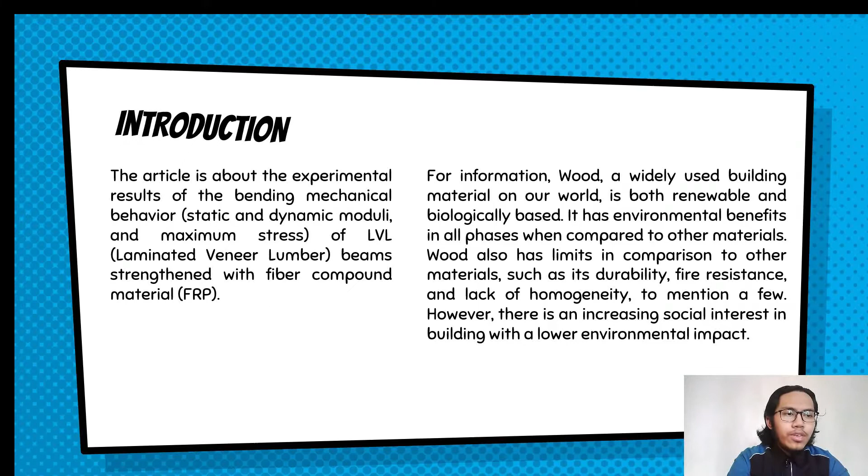For the information, wood is widely used as a building material, which as renewable and biological has environmental benefits in all phases when compared to other materials. Wood also has limits in comparison to other materials, such as its durability, fire resistance, and lack of homogeneity. However, there is an increasing social interest in building with a lower environmental effect.

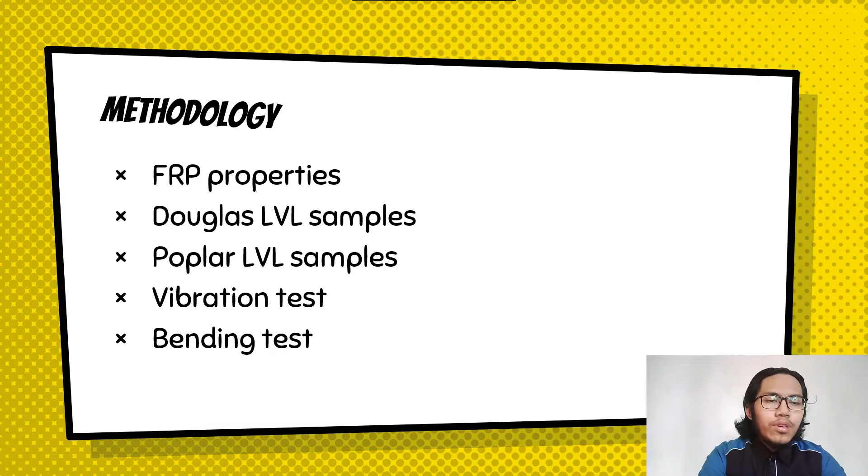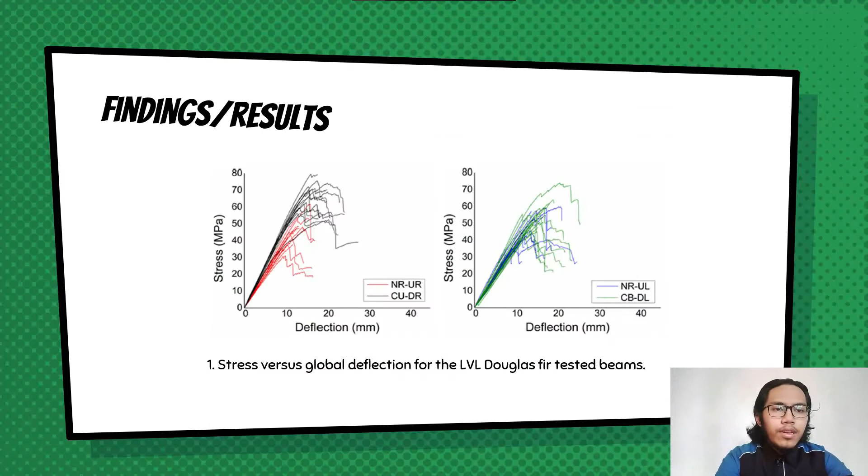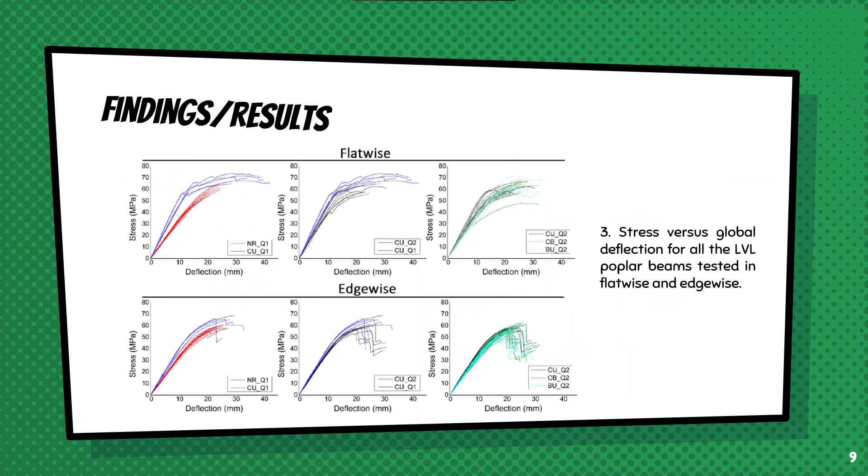For the discussion, first the Douglas LVL. The result summarizes the average values of the main mechanical properties of LVL Douglas fir. It is obvious that two types of reinforcement act differently, and an increase in the maximum stress of 16.4% was achieved for this type of reinforcement.

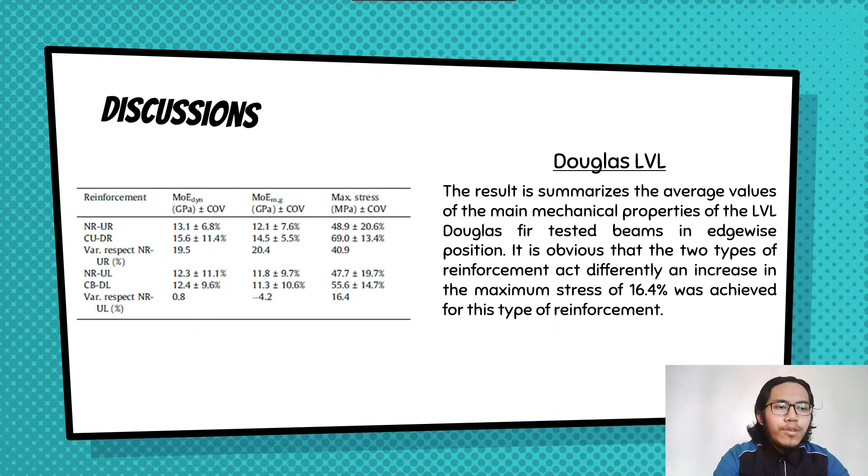For the poplar LVL, the figure shows some examples for each failure pattern. Furthermore, all the beams with FRP tested in flatwise position had shear failure. The reason lies in the fact that the flexural strength contribution of the FRP exceeds the shear strength of the poplar veneer itself. As a result, shear resistance becomes a key aspect for both design and proper application of the reinforcement.

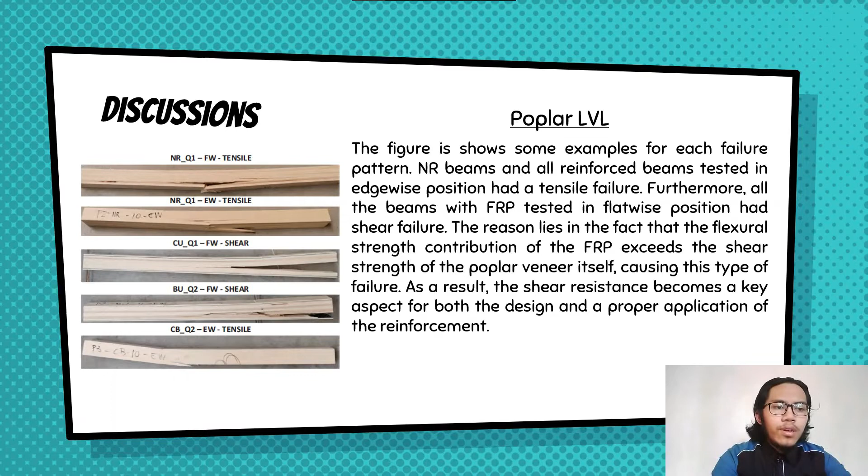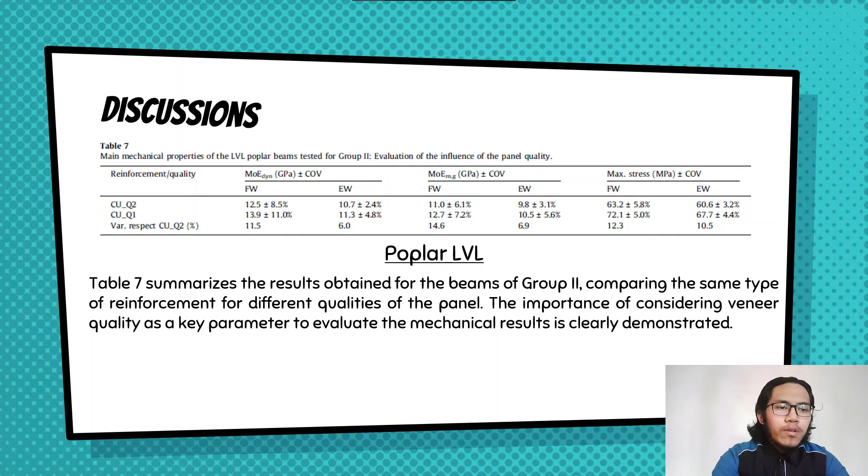The table above summarizes the results obtained for the beams of Group 2, comparing the same type of reinforcement for different qualities of the panel. The importance of considering veneer quality as a key parameter to evaluate the mechanical result is clearly demonstrated.

In conclusion, directional carbon has been shown to provide a significant improvement. The influence of the panel veneer quality was also clearly demonstrated. The weakest wood material improved the most in mechanical qualities when reinforced, allowing for stiff second quality poplar LVL or strong second quality Douglas fir LVL.

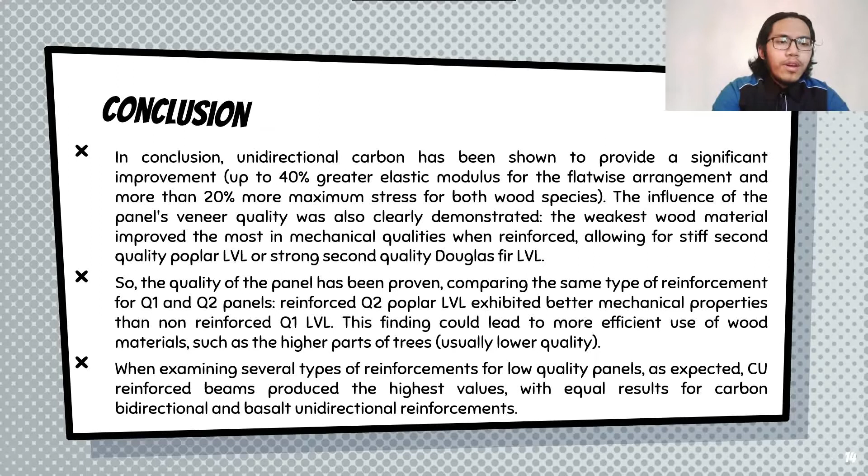The quality of the panel has been proven compared to the same type of reinforcement for Q1 and Q2. Reinforced Q2 poplar LVL exhibited better mechanical properties than non-reinforced Q1 LVL. And lastly, when examining several types of reinforcement for low quality panels, as expected, reinforced beams produced the highest value, with equal results for carbon bidirectional and basalt unidirectional reinforcement.

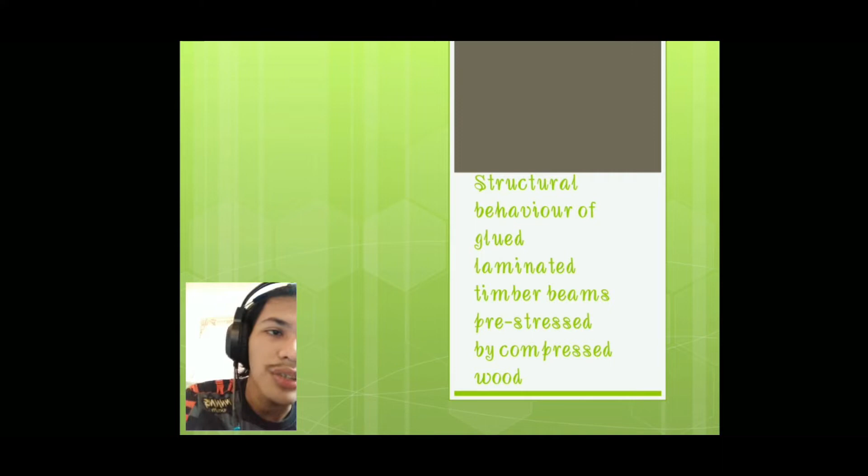Today I will present about the structural behavior of the glue laminated timber beam, which is glulam pre-stressed by compressed wood. For the introduction, this article shows an experiment about the glulam beam that's strengthened by inserting the compressed wood block into the pre-cut rectangular hole, which is 1/3 of the beam depth from the top of the beam.

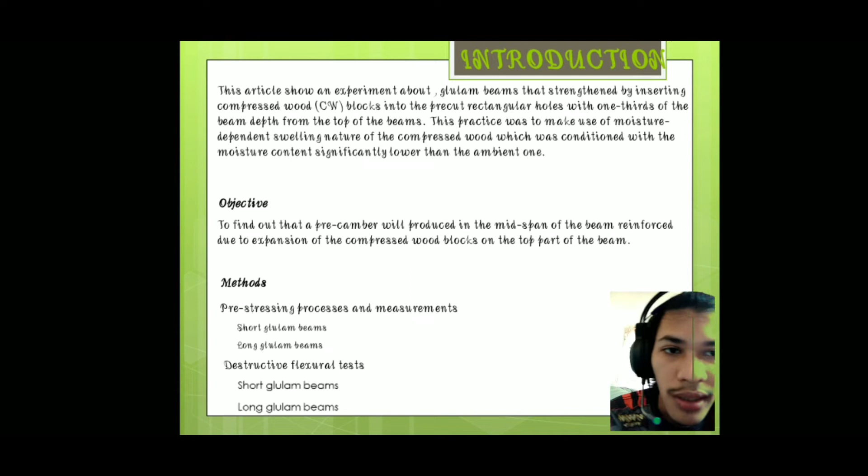This practice makes use of the moisture-dependent swelling nature of the compressed wood, which was conditioned with the moisture content significantly lower than the ambient one. For the objective, to find out pre-camber will produce the mid-span of the beam reinforced due to the expansion of compressed wood blocks on the top part of the beam.

The method used in this article is the pre-stressing process and measurement for the short glulam and long glulam, and then destructive flexural test for the short and long glulam.

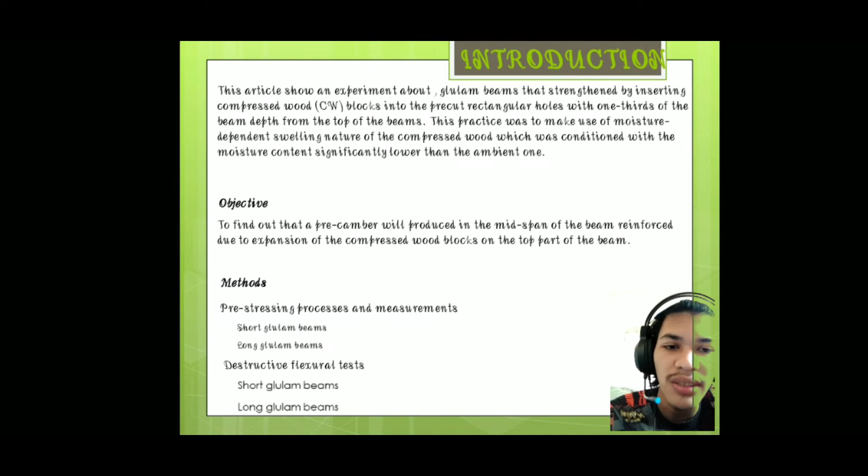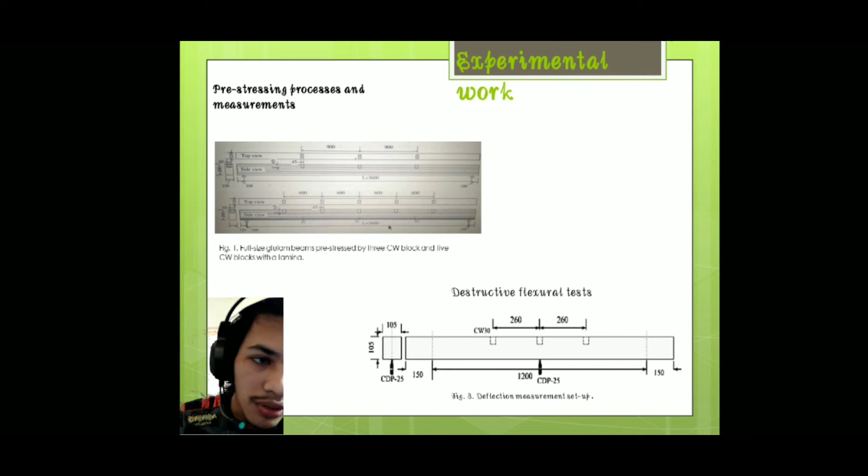The experimental work first is the pre-stressing process and measurement. The diagram shows the full size glulam beam pre-stressed by 3 compressed wood blocks and 5 compressed wood blocks with lamina. Next is the destructive flexural test, which is the diagram about the deflection measurement setup.

Result and discussion for the pre-camber deflection and pre-stressing state. Diagram 4 shows the strain gauge location through the long beam depth.

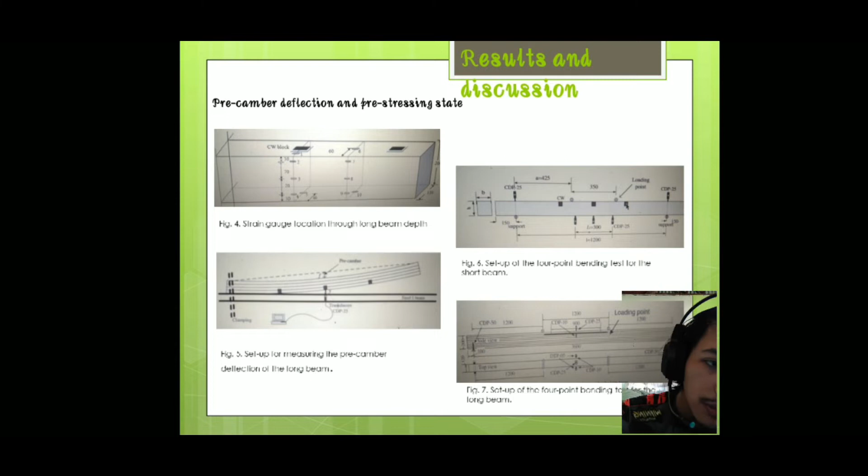Figure 5 shows the setup for measuring the pre-camber deflection of the long beam, and figure 6 shows the setup of the 4-point bending test for the short beam, and figure 7 shows the setup of the 4-point bending test for the long beam.

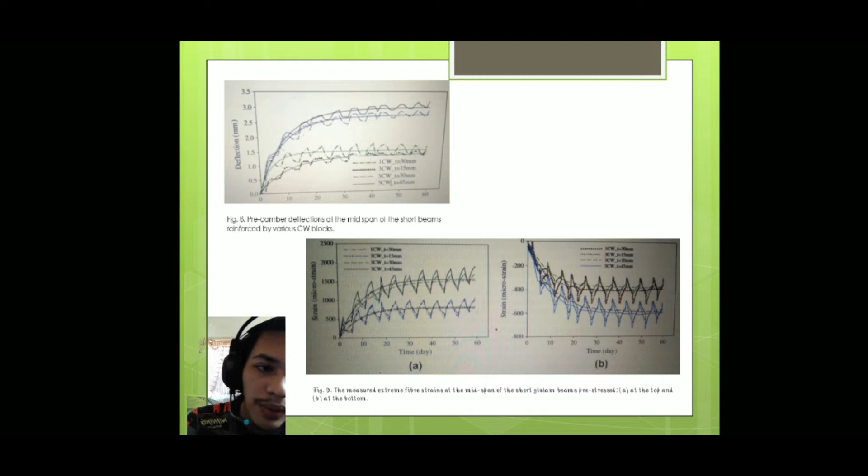Figure 8 shows the graph of pre-camber deflection of the mid-span of the short beam reinforced by the various compressed wood blocks, and figure 9 shows the graph of the measured extreme fiber strain of the mid-span of the short glulam beam, pre-stressed at the top and the bottom.

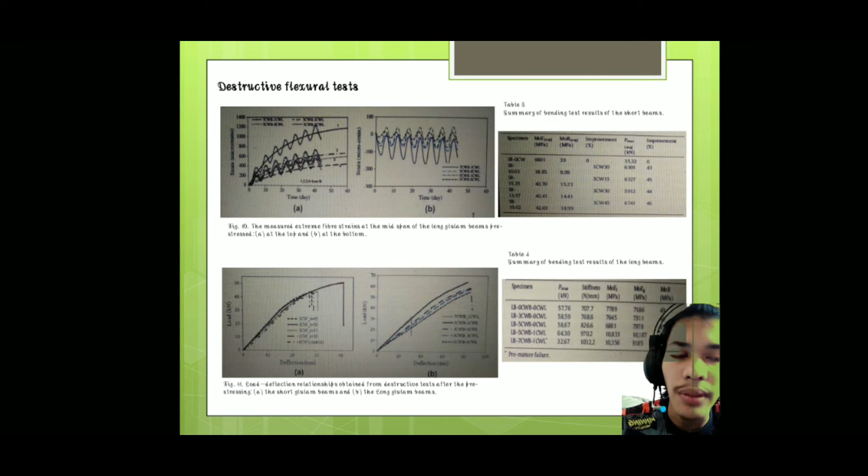A is the short glulam beam and B the long glulam beam. Table 3 shows the summary of the bending test for the short beam, and table 4 is the summary of bending test for the long beam.

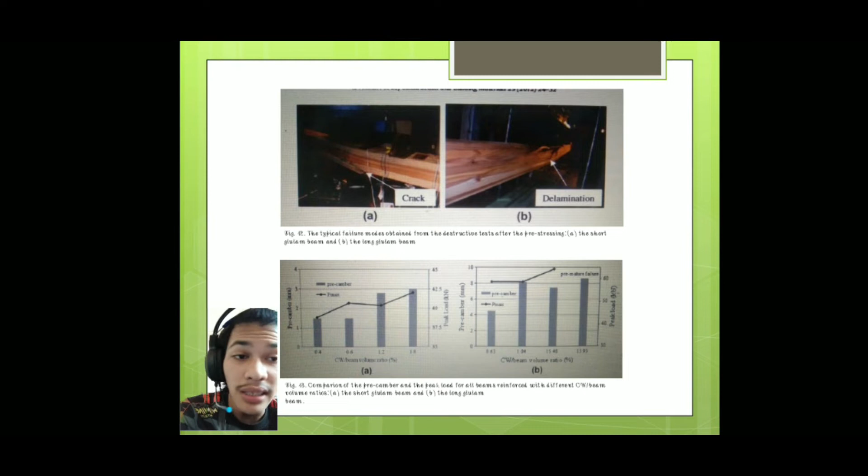Figure 12 shows the typical failure modes obtained from the destructive test after pre-stressing. The short glulam beam will be cracked, and for the long glulam beam it will be delamination. Figure 13 shows the comparison of the pre-camber and the peak load at all beams.

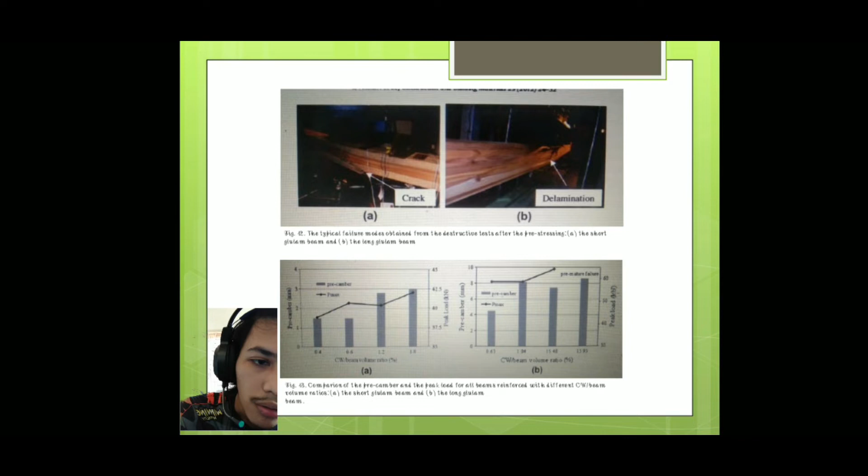All beams are reinforced with different compressed wood or beam volume ratios. A is the short glulam and B is the long glulam.

In conclusion, the use of compressed wood made of low grade wood through densification as a reinforcing material has been proved effective, as only a small amount of compressed wood is required and no bonding between the compressed wood and the beam is necessary. The technique developed is economical and environmentally friendly.

This shows that controlled moisture-dependent swelling of compressed wood are crucial to pre-stress the glulam beam and to produce the pre-camber, as well as initial stress to partially cancel out working counterparts before the destructive bending test. These indicated tests significantly enhance the bending capacity and initial stiffness.

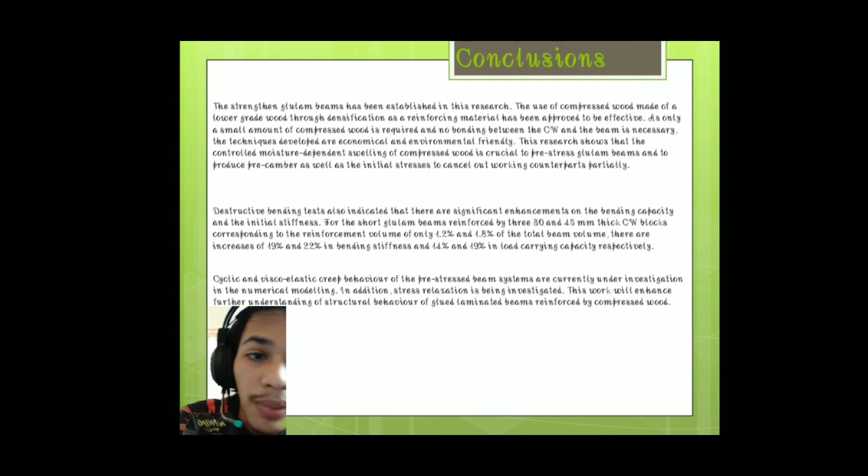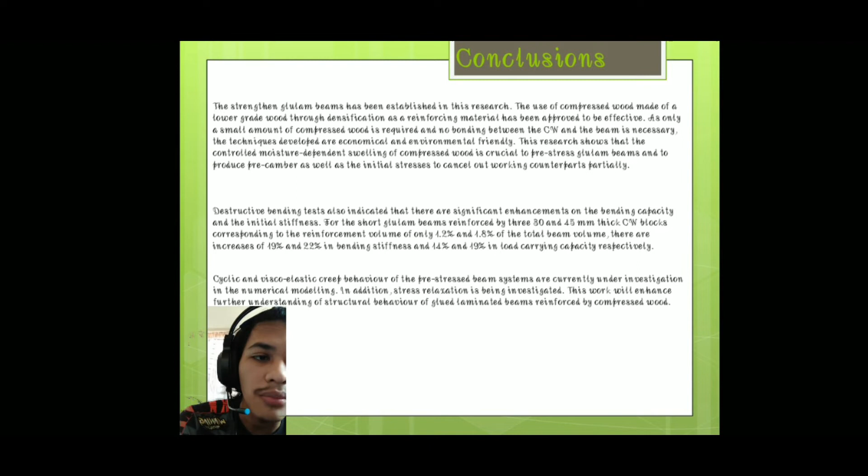For the short beam, reinforced by three 30 and 45 mm thick compressed wood blocks, corresponding to reinforcement volumes of only 1.2% and 1.8% of the total beam volume. There was an increase of 19% and 22% in bending stiffness, and 14% and 19% in load carrying capacity, respectively.

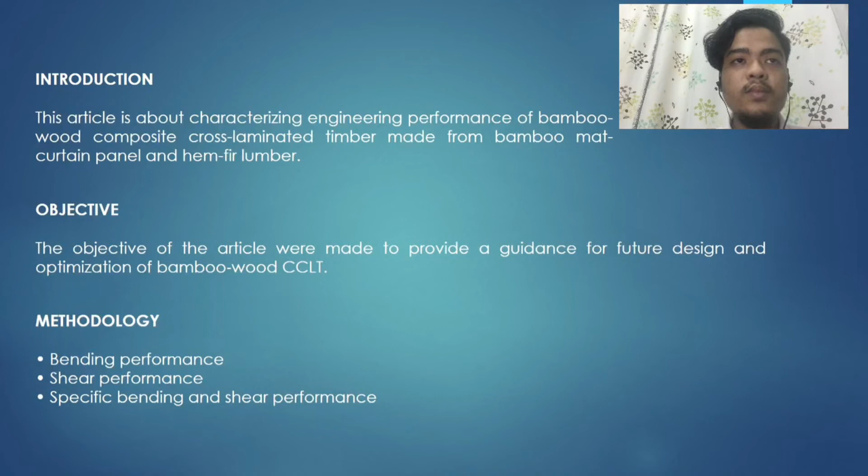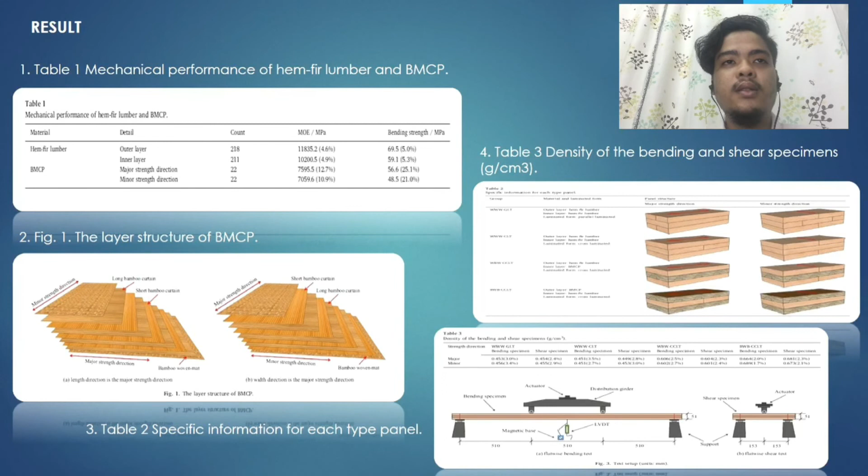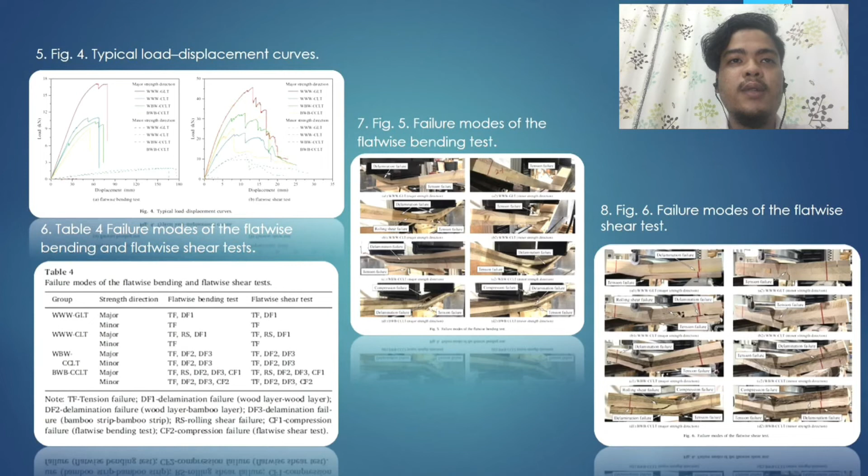Sixth, failure mode of the flatwise bending and flatwise shear test; seventh, failure modes of the flatwise bending test; eighth, failure modes of the flatwise shear test; ninth, test results of the flatwise bending and shear test; tenth, experimental versus theoretical values of bending MOE; and lastly eleventh, correlation between MOE and layer thickness.

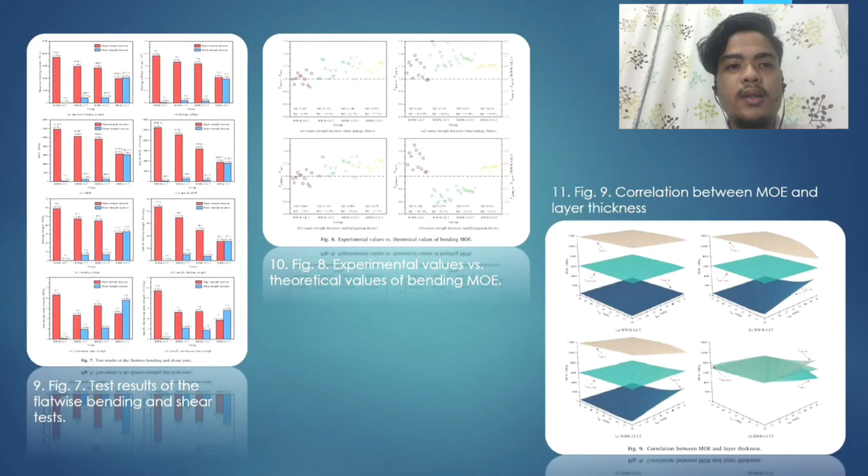This is the discussion of the article.

This is the conclusion of the article.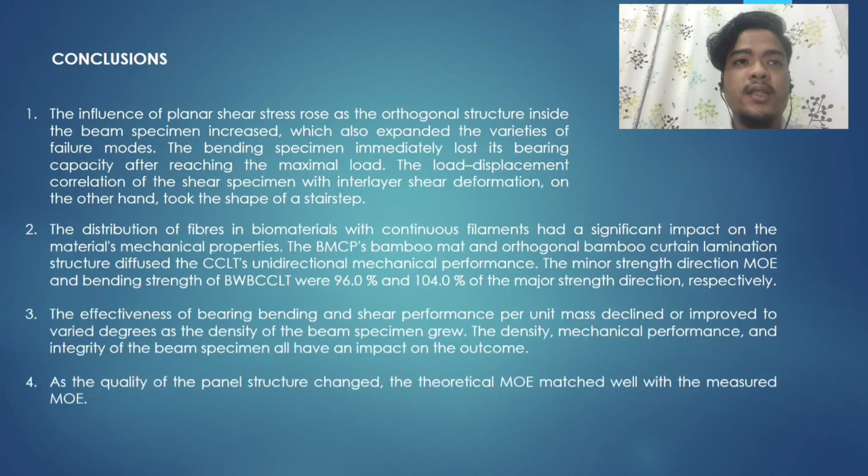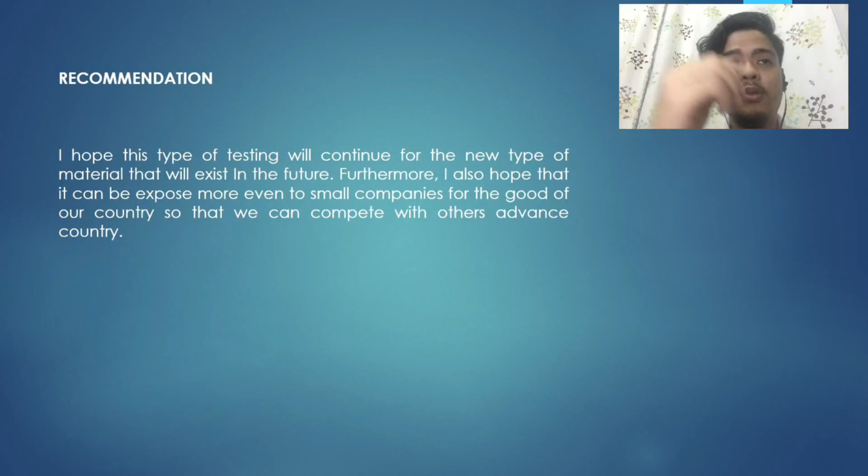As a recommendation, I hope that this type of testing will continue for new types of material that will exist in the future. I also hope it can be exposed more, even to small companies, for the good of our country, so that we can compete with other advanced countries.

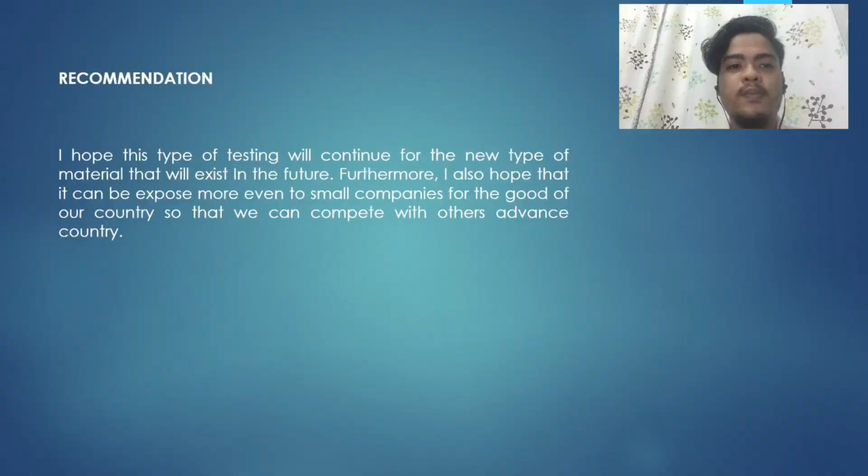How is the study going to contribute to development of future sustainable products? The study can contribute by giving information about what sustainable products can do. The sustainable product can be compared to the usual product, and it is proven that the sustainable product is as good as the usual product.

By using this sustainable product, it can save the environment and reduce the costs of construction, such as logging and buying the usual product. For the conclusion, based on the article selected, we conclude that we choose CLT, cross-laminated timber, as the best product among the 3 articles researched.

It is the most common and familiar form of mass timber, and the one that has opened up the most new architectural possibilities is cross-laminated timber. CLT structures successfully store huge amounts of carbon and have been demonstrated to produce fewer emissions than other construction materials.

It is recommended that a common process level standard be established, since this would expand the sectors of use for timber engineering and boost CLT in competition with solid mineral-based construction materials.